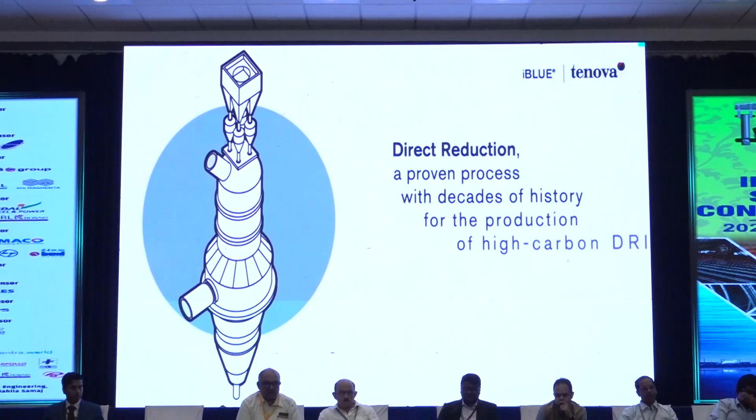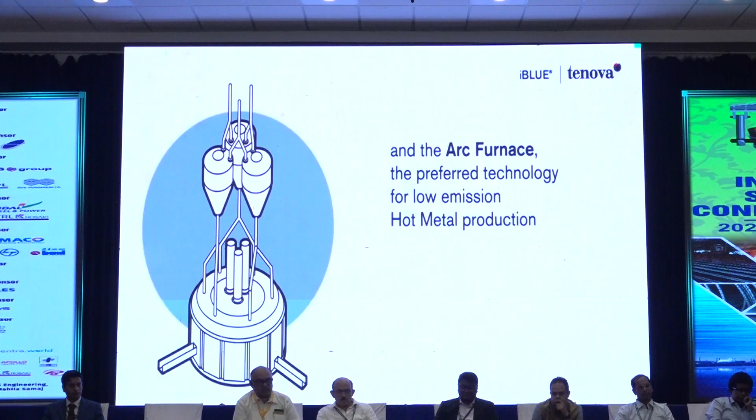Reducing CO2 emissions. Direct reduction, a proven process with decades of history for the production of high carbon DRI, and the arc furnace, the preferred technology for low emission hot metal production, are now combined into one integrated new process, iBlue. Iron ore pellets, either BF or DR grade, are progressively reduced from oxide to metallic iron, and then further converted to iron carbide.

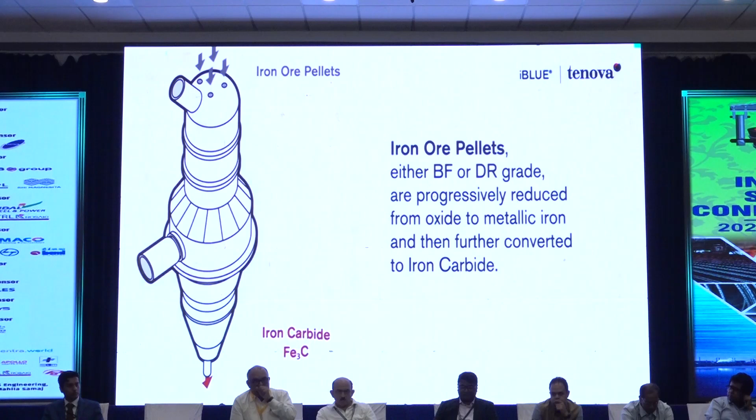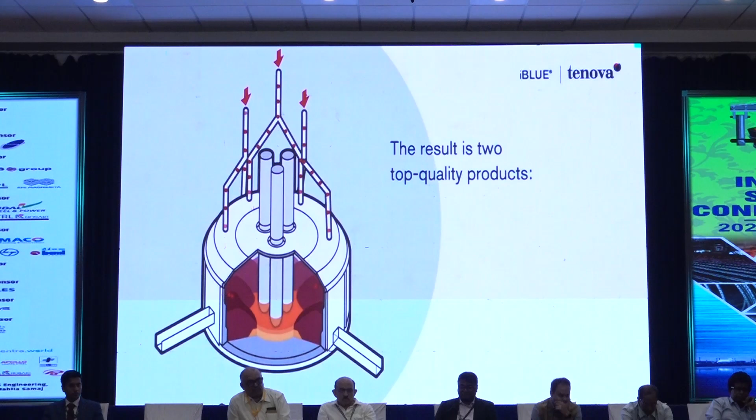Reduced pellets with high carbon content proceed to the next step of transformation at the temperature of about 700 degrees Celsius. Hot pellets are gravity fed at a constant flow rate into the arc furnace, where they are melted by the electric arc. The result is two top quality products: hot metal to produce all grades of pig iron or to feed a downstream steel plant, granulated inert slag for the construction sector or other industries.

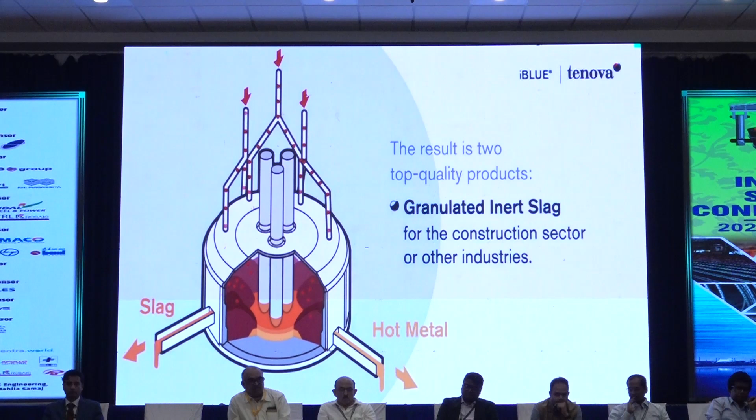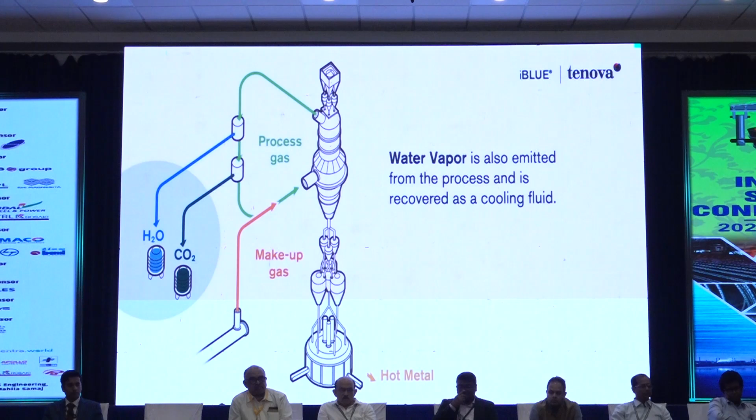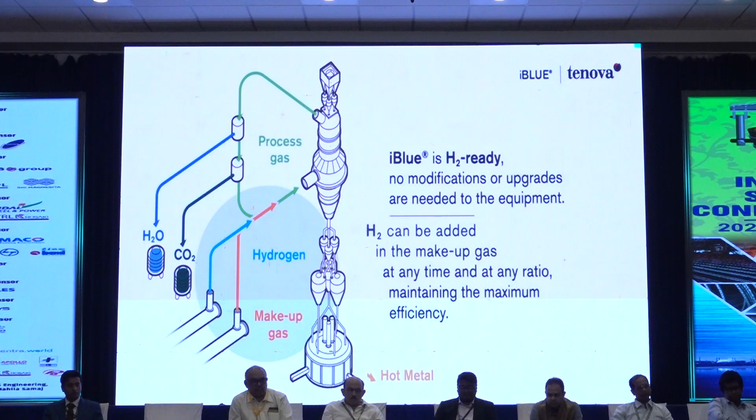100% of the processed CO2 is selectively sequestered for storage or commercial use. Water vapor is also emitted from the process and is recovered as a cooling fluid. iBlue is H2 ready. No modifications or upgrades are needed to the equipment. H2 can be added in the makeup gas at any time and at any ratio, maintaining the maximum efficiency. When using 30% H2 and 70% natural gas, the resulting pig iron product keeps a carbon content of at least 3.5%.

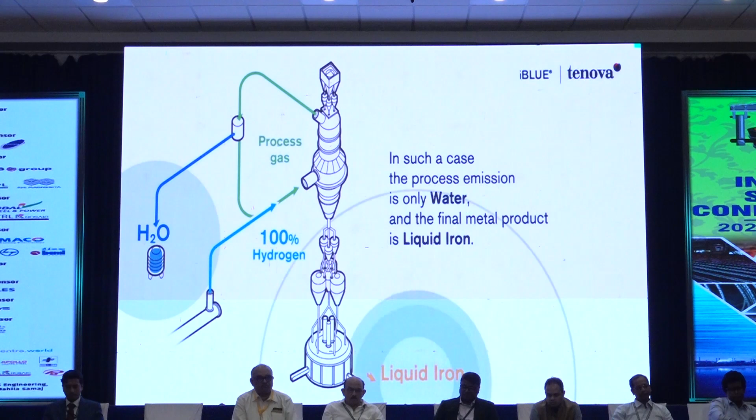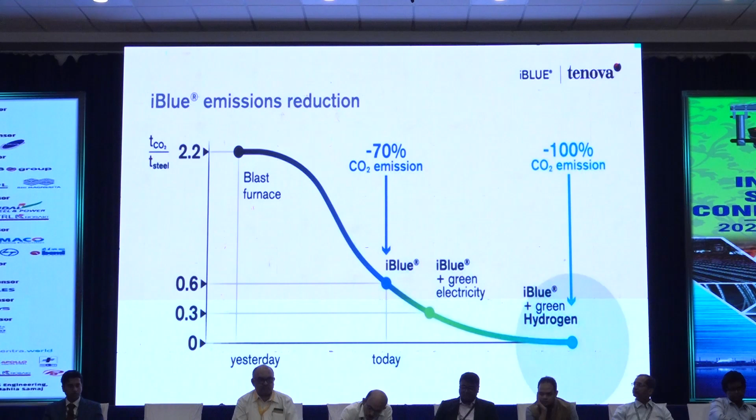iBlue also allows the use of 100% H2 as the makeup gas. In such a case, the process emission is only water, and the final metal product is liquid iron. iBlue technology exceeds the scale of millions of tons per unit. Fossil-free steel production is real. Tenova.com. Thank you.

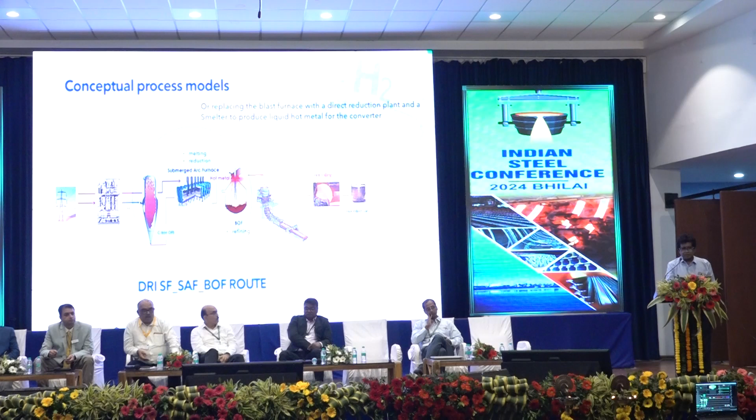Or it may well look like this also: DRI shaft furnace, then submerged arc furnace and the BOF route. Here we will be able to produce hot metal from this carbon-free DRI in the submerged arc furnace and then continue with the refining.

So what is the implication of using 0% carbon DRI or HBI? Most importantly, you will be requiring more energy, because the temperature at which the steel melts increases with decreasing percentage carbon. And thermodynamically speaking, when you talk about low carbon steel, you normally produce more FeO in the slag, that calls for lower yields. And also there will be less available in situ chemical energy in the DRI because of almost no carbon.

And other carbon sources will be needed for FeO DRI reduction, foamy slag, all those parameters that have to be taken care of in any case if you want to produce steel. Then you would be requiring vigorous bath stirring. Because of less carbon, the churning of the bath will supposedly be less, so you need artificial bath stirring from the bottom.

And all these will probably lead to more refractory wear because of longer melt times, FeO erosion of magnesia carbon bricks and carbon dissolution. So we need to think or rethink the refractory systems that go into these steelmaking parameters.